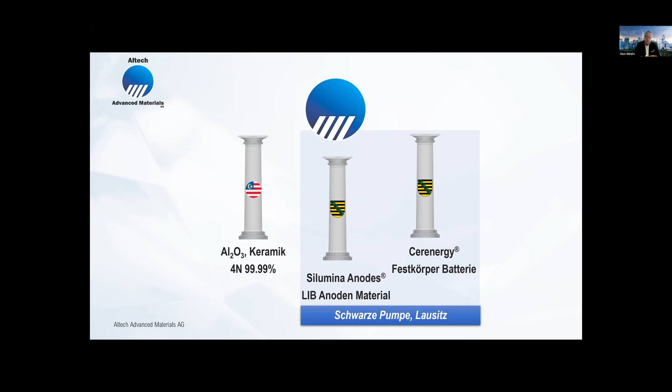To give you the idea, all the projects that we're doing in Germany are under operating limited liability companies, and they're owned 25% by Altech Germany, listed in Frankfurt, and 75% by Altech Chemicals, listed in Perth, Australia, on the Australian Stock Exchange.

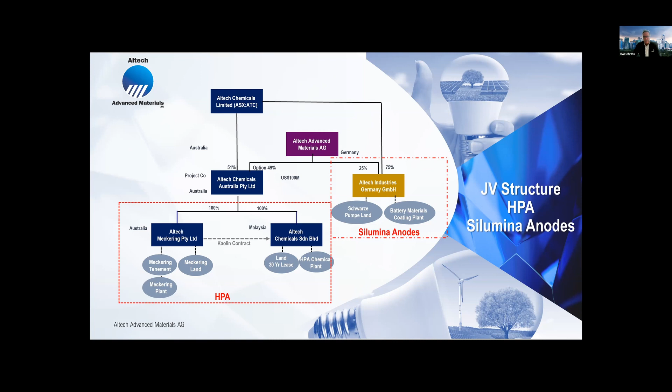There's a large part in Malaysia for the alumina project, and then we have a company called Altech Industries in Germany, which owns the industrial land in Schwarze Pumpe in Saxony, and is also the developer of the battery materials plant. Then we have a second project, which is the joint venture.

That was the one that I presented at the last IIF, which is a solid state sodium alumina battery. That is a joint venture with the Fraunhofer Gesellschaft IKTS. Fraunhofer is the largest German science institute, where 75% is industrial and 25% is German government supported. It's very significant—they normally just sell licenses, but we have a true joint venture called Altech Batteries, who commercialize the solid state sodium battery.

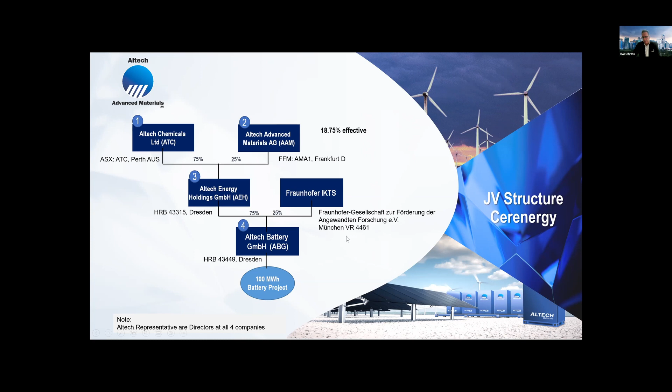So if I just start with the coating material, we are building the pilot plant that is under construction, and I'd like to recap the specialties of our product. We are doing a wet chemical process, which is the cheapest process known today. Many people have tried and have not succeeded. It's easy to scale up. We are green, and we adapt to the various lines that have different types of battery chemistry in order to improve the anode material. Our process is a low temperature process, which saves a lot of energy.

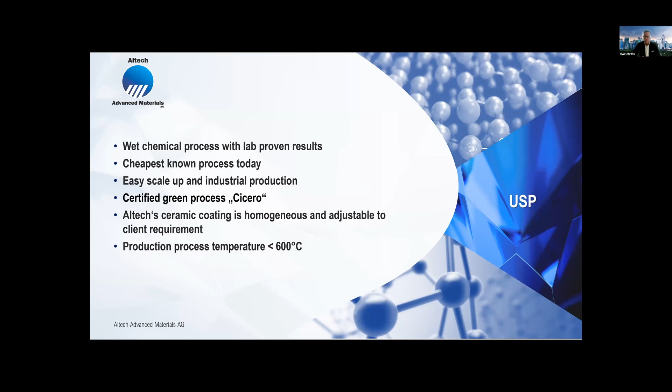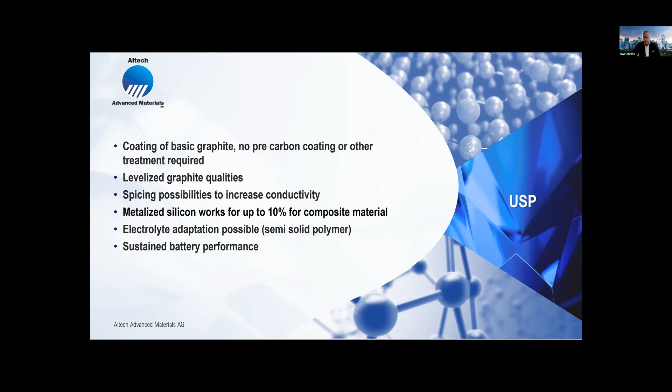The coating of the basic graphite on the anode is not an easy process, but it is a levelizing process. Remember, we saved the first cycle loss, which improves the battery by 10%, and we levelize graphites—there's very expensive graphites, carbon coaters, so that is a really important part. The other thing is that we increase conductivity by splicing and adding metallized silicon, which I previously explained.

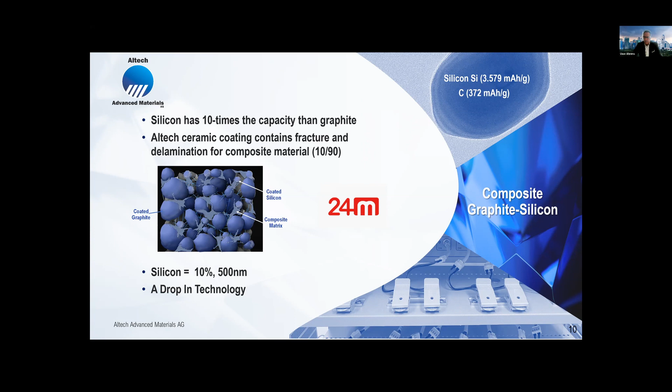That leads to a very sustained battery life and much better performance. For example, in the silicon that we are adding, up to 10%—nobody has achieved that yet. Tesla is adding about 5% silicon oxide, which has a very limited increase. So we are the first ones that really do this in a professional, industrial manner.

We now have batteries running at 430, which is a 30% increase in stable capacity, and these batteries are running above 1,000 cycles. Our present target is 550 milliampere hours per gram, which would be almost a 50% increase. That is a very significant target. We are achieving that in some cases, but not stable enough for industrial process. So it's just to show where we're going.

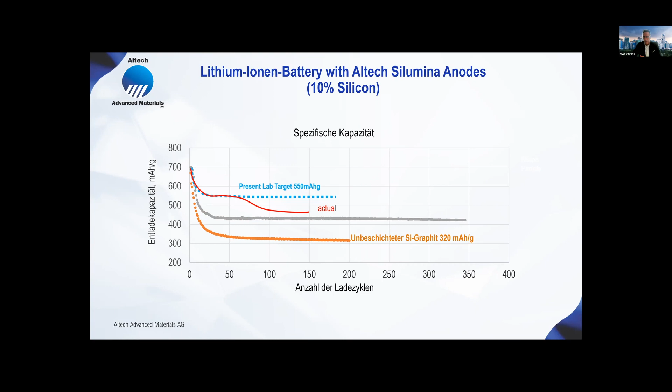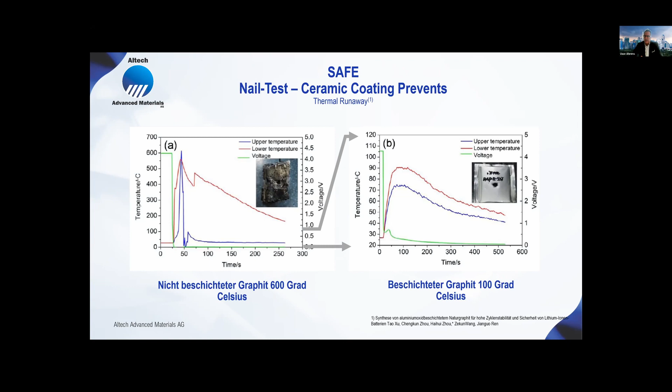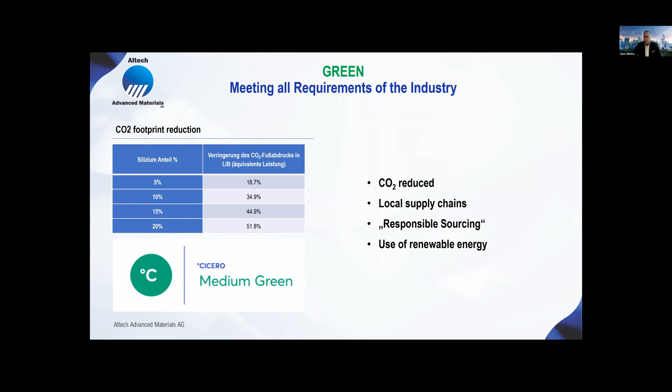The progress report is that, last time I reported, we're building a pilot plant for materials that can be qualified. That is fully ongoing. Factory acceptance test of the wet process is starting today. We have almost completed all working papers, analysis, all the consumption materials are there. We have all the approvals for operating this plant, and we have all personnel employed.

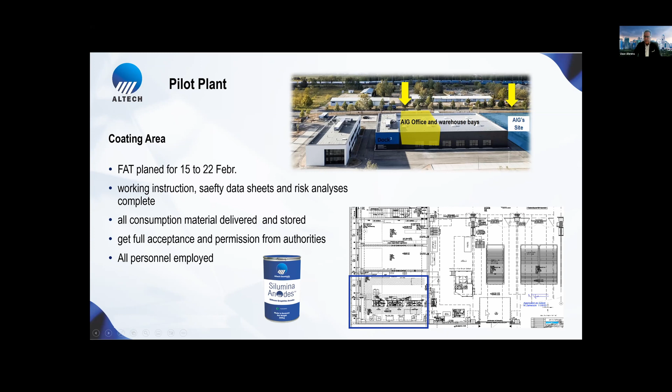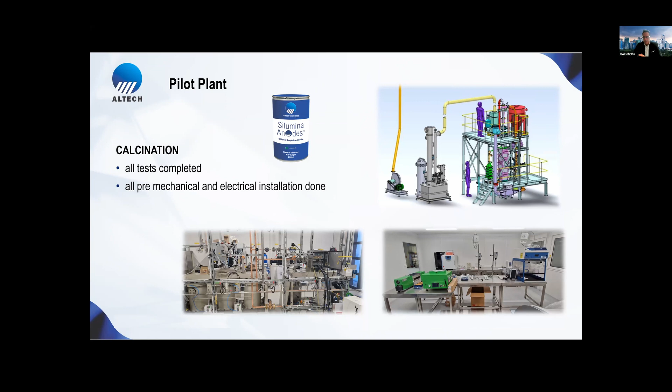And then there are some other pictures of actual equipment. This is part inside of our laboratory. In the laboratory, we have the full test scheme that we can do everything, and also running the batteries in cycles so that we have stable industrial things. This is part of the equipment that is installed, that is already there.

With this pilot plant, the importance is that by mid-year, we will have material to be given to all the battery manufacturers that we're dealing with at the moment, the car manufacturers we're dealing with, in order to start the qualification.

At the same time, we have announced that following the pre-feasibility study, which looks very good, we're now doing a detailed feasibility study, which is the detailed design of the main plant with the first line of 10,000 tons of material.

These are pictures of the layout. This is the first processing line, the utilities, and then we expand each line over here. These are offices, material coating, so that's all done. And we have bag acceptance, wet process.

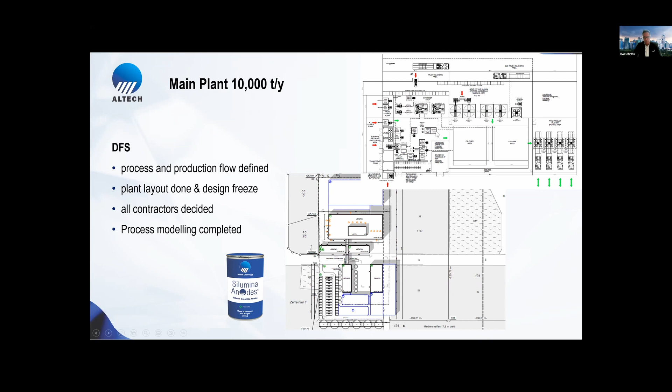Just to show, the main plant design is almost done. So we are progressing well with the target to complete our DFS in mid-year. After that, we have to pass the final qualification. Then we will move to offtake agreements, go for funding, and then we will go ahead.

I guess the market is pretty confident, that's why our share price has done so well. We will succeed in industrial production of this product that we are successfully producing in the lab, in both labs - the one in Australia as well as the lab in Germany.

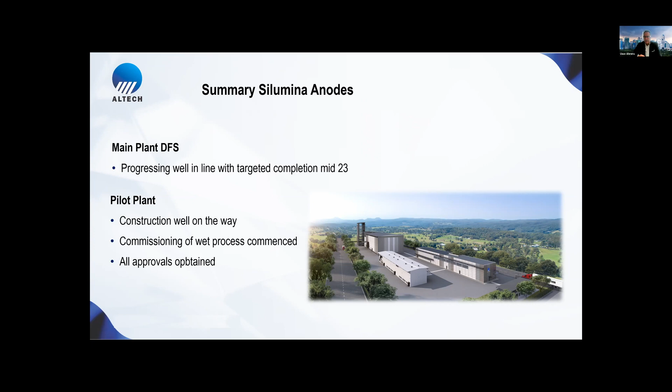Now, the other company that I mentioned before is Altech Batteries, which was formed out of a joint venture last September for the solid-state battery that I introduced back then. Now this battery, as you know, is ready. It's running. You can test it, all the cells.

The pilot plant is running in Fraunhofer, and now we're making an industrial battery out of it, which is used as grid energy storage. Quite important - we're not competing with lithium-ion batteries. We have a completely different market segment for grid energy storage: higher voltage, long-living, robust, fire-safe.

All the things I presented last time - important is, originally the presentation was about the running batteries we had, which are 10 kilowatt hour battery packs at 220 volt. Now with the market study and client requirements, we have finally decided on the design and specification of the final product, which is a battery pack called ABS60, which is 60 kilowatt.

A battery pack is like a cabinet, 2 meters high, 55 centimeters deep, and that is a ready pack. This is important - this pack will be ready in 3 months, and it's a standalone plug and play. It has everything inside, battery management system, everything is ready.

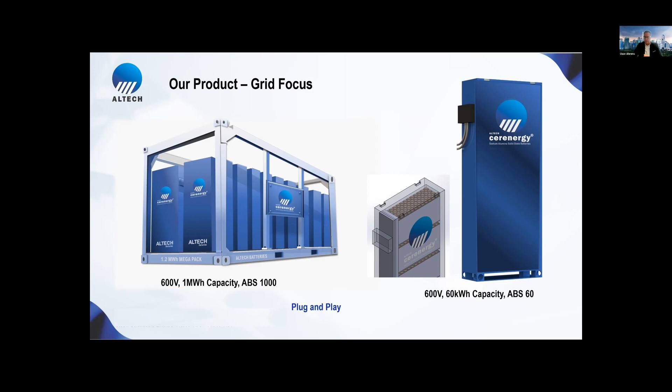Grid focus. Now, the other thing is that we have found out for the goal of the financing, it's not only important to produce this battery, but recycling is a big thing in order to have the value chain. Now, you can imagine our battery doesn't contain copper, doesn't include cobalt, doesn't include lithium, doesn't include manganese. So the recycling of this battery is very simple.

So we are in the final stages of designing a plant for the recycling, and there will be joint venture partners who do the recycling. We always need recycling because even during the production process, almost 5 to 10% of the batteries will have a malfunction for whatever reason. So those ones are recycled right away, the nickel is recovered that is inside, and the rest is used for other things. It's very important.

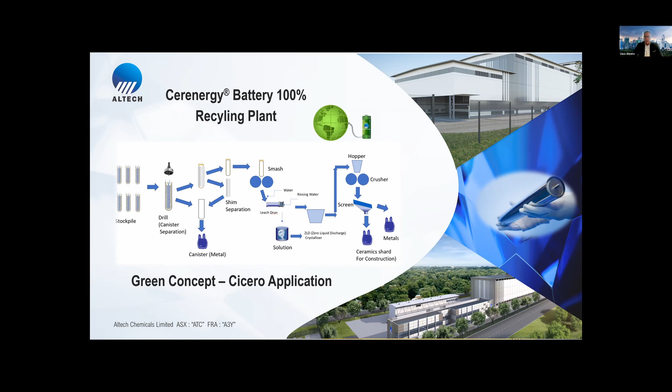Why is this Cerenergy battery so important, or why is grid applications important? This is a short graph in Germany representing Europe. It shows the auction price on the European Power Exchange on the 1st of January, and you can see here it's negative. That's the nonsense of the thing.

You have offtake agreements with renewable energy. You need to take it, you can't put it in the ground. Some can switch it off, but solar, you have to take it. So you have to pay to get rid of that power into the grid because the grid's already overloaded at that time. But then at lunchtime, doesn't matter if it's New York, Los Angeles, Frankfurt, or Munich, the energy providers have to buy power at a premium. That is a $1 arbitrage for trading.

That is crazy, and that is the problem. Renewable energy can be produced plentiful, but it's not produced when you need it, or you can't bring it to the area where it's required. So any renewable energy solution doesn't need more solar, it needs energy storage first. It's the same in October when I was in California. The grid's overloaded, the windmill is stopped, the solar power is put into the ground, and you lose the money.

In Europe it's the same. In Germany, we have all the windmills in the North Sea, but the power is required in the south of Germany, in Bavaria. What happens? The number is phenomenal. In the last report of the German grid agency, they reported that the German loss in '21 on this redispatch alone is 2.3 billion euro. That's a phenomenal amount, and this is money you can save.

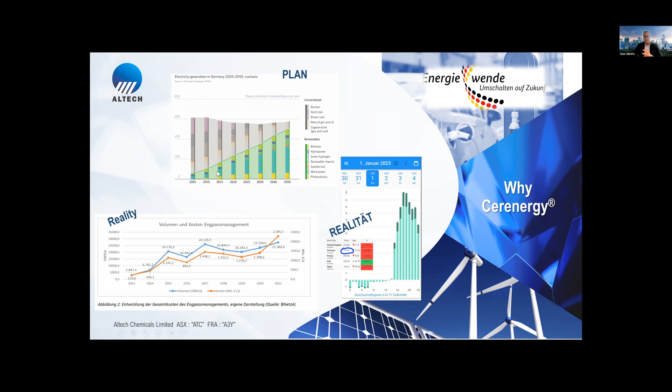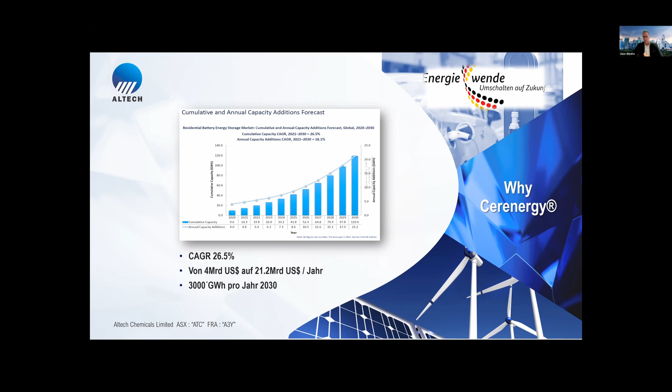That's why we are focusing on the first rollout into market on energy providers. We will have a few offtake agreements and start production. The reason is simple: we have the lowest levelized energy storage cost. The longer your battery lasts, there's no degradation, and the power that we have is safe.

After that, we go into industrial providers that provide large solar parks, or for example hydrogen, or steel mills and everything. All of these will be big users of this type of battery, in direct competition to, let's say, Tesla Megapack, or Tesvolt, or Freyr, or Northvolt LFP batteries.

So we are ready, and the three areas that we actually sell to our clients is the renewable integration that I just explained. The other one is grid stability, that means net frequency. And the other one is peak shaving, where at lunchtime you start a power station at 10, throw the energy away, then at 12 when everybody starts having lunch, the power demand goes up, then you run the power station down again. So that's a huge loss.

On the industrialization, for the grid pack, we have the design of that container ready. It's very important that it's CSC certified, so we're hoping before end of the year we have the certification ready. Then it's a fully loaded container, meaning our battery packs can be transported on trucks, ships, trains, everything, because they have standard dimensions, standard safety, standard strength. It's very simple: you come to the factory, pick it up, and it can go anywhere.

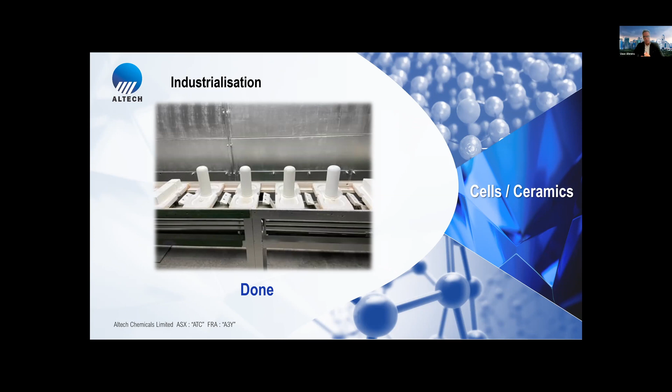Then the main cylinder, this is what the battery looks like, so that's also all done. We're just finalizing, and we've already done the layout of the plant.

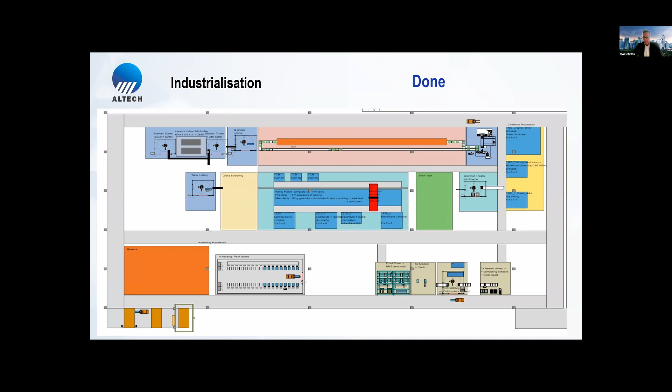Just remember, we signed the joint venture in September. This is all fully running. We are in full swing to do the detailed feasibility study, which will be finished end Q2, early Q3. For the DFS, we need all the detailed design, the equipment selection, the costing, the unit rates. So we have appointed and chosen all contractors already. We've told you before, we finalized the product design, we have the layout. All the things are ongoing. I'm happy to say that besides environmental, we have received all approvals, and that's really a very exciting thing.

And maybe to say a little bit on the side, the state of Saxony has formed a special task group to assist us in the development of this large-scale project. It's a bit like when Tesla did it in Brandenburg. It was all fast-track. We also want to be fast-track. It's very important to come into the market as fast as possible. They have their own task force that assists us with everything in all the permits. And we also, as you know, we have a 14-hectare land site at the moment. And we applied for an additional 60 in order to have the upcoming gigafactories that are planned.

We are in client offtake discussions. You can imagine that is not really a big challenge, because it's a seller's market. You can't get any batteries, doesn't matter if it's sodium sulfur, LFP, NMC, all these batteries. That's why Tesla also is rolling out mega packs. So that is not a problem. The problem is the people want to have the prototype, which will be ready in 3 months at this size. Of course, we have batteries now. We have 10 kilowatt, but they want full operational 60 kilowatt pack and test it, and then we will enter into the offtake agreements.

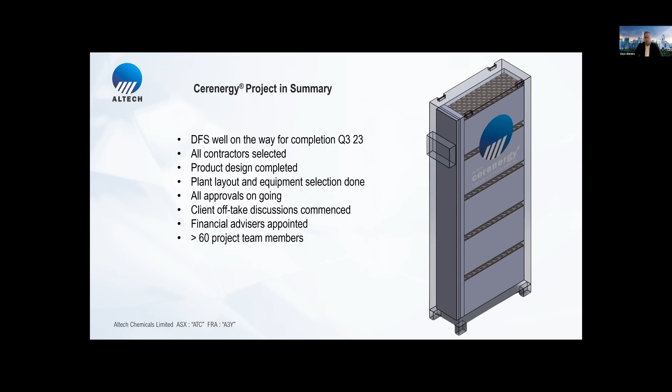Why am I telling you all this? Because I have made many presentations telling you what are the benefits of our product, where are we going, how do we get the funding. So all these promises and explanations have to be followed up by action and have to be implemented. And today is the presentation where I want you to know that this is going on, and that is truly on track. And from the second half of this year, this will go into a different speed. After that, we know the details, we know all the kind of things. We're going to go into financial markets, and we will start construction on both of the projects.

We have an interesting board advisory. On the political side, we have Nikolaus Graf Lambsdorff, who is the son of Otto Graf Lambsdorff, assisting us in all the applications for grants, which I cannot confirm yet, but it's looking good. We have made presentations in the Chancellery in Berlin. We have discussions with the Strukturwandel, and we also have discussions with others - not sure how they'll work out, but again, we totally fit the bill. We have Werner Klatten on the financial side. We have Peter Rosenthal on industrial advisory, and Wilko Stark from the automotive industry, the former head of mobility. So we are fully connected, and we get good advice.